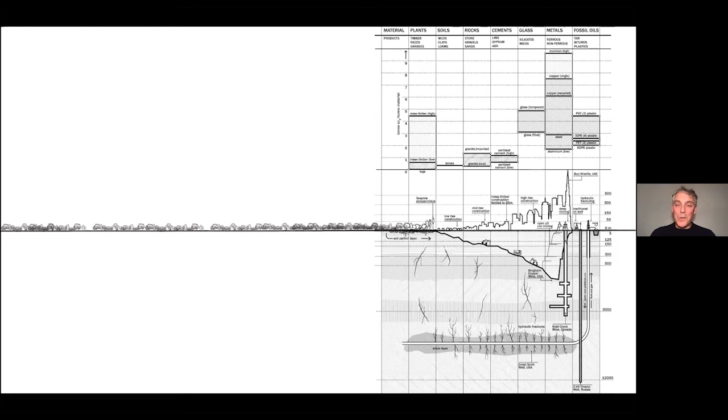I confess to having stolen the title of this talk, "What is Wood Anyway?" from my friend and colleague Kiel Moe, who asked this question, I'm pretty sure rhetorically, as we were walking down the street in Montreal one day after having heard a discussion on the new product cross-laminated timber. I think I took Kiel's question to mean, and I hope I'm not putting words in his mouth...

...that wood is misunderstood as a building product, and we need to look at it more broadly in a transcalar way. As he would say, from the molecular to the territorial. So I'm stealing this notion of the transcalar aspect of wood, and it's a way to approach it in a kind of systems thinking method, as the subject of my talk today.

So we know wood, we know it's a product, and we know that it has certain kinds of properties that make it challenging for contemporary engineering to deal with. And we know about boards and their different appearance grades and things like that, and basic structural knowledge.

But as architecture has become more commodified and its process more commodified, we've narrowed our vision of wood into increasingly marginalized ideas about wood, its properties, and its capacities. And we've become distanced from the actual aspects of what wood is, all of its attributes, all of its performance characteristics, and all of its potential implications for global health.

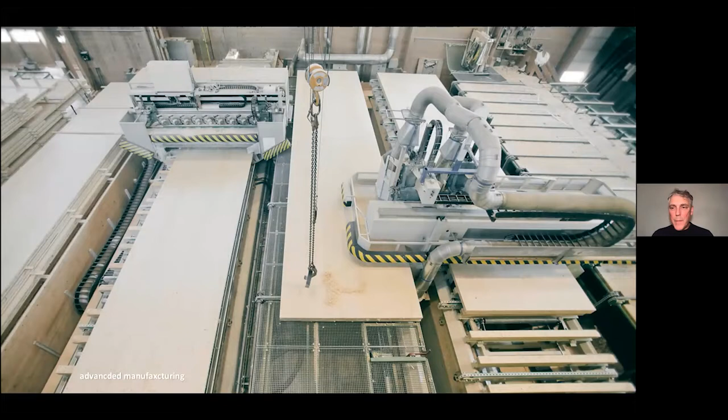Products that are particularly effective because they're really amenable to all the kinds of new computer-aided systems for manufacturing, and they come in extremely large formats, which means we can build buildings really quickly with them.

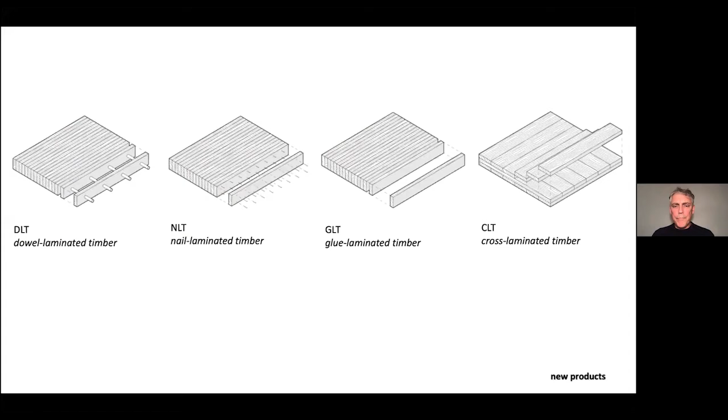And so these material assemblies can be scaled up into tectonic assemblies, and those tectonic assemblies can produce really big buildings, as recognized by the 2021 IBC.

I won't go into the detail of this, you're probably all pretty familiar with it, but essentially, we can now build buildings that are 3 times as tall as the buildings that were allowable under the old Type 4 heavy timber masonry, non-combustible enclosure building type. That means we can build really tall buildings.

And getting back to Kiel, what I guess I would say is the tall building, and the race to produce ever taller buildings made out of timber, is just one more product that fails to recognize all of the chances and opportunities that face us when we think about using wood globally in construction, and also that we potentially miss all of the challenges and dangers and risks associated with it.

So I think if I could sum it up, I think what Kiel really meant was: we could really screw this thing up.

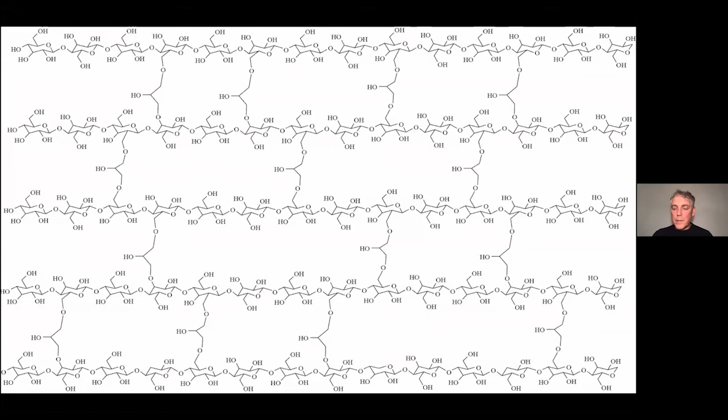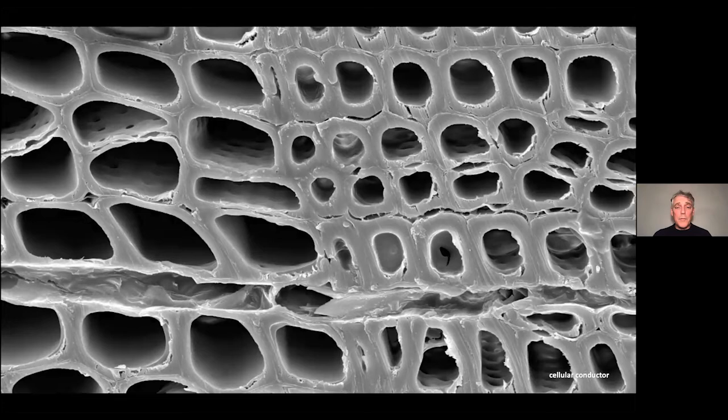Wood is a whole host of things. Wood is a molecular lattice that holds carbon, stores carbon molecularly. It's a sort of cellular conduit system for bringing water in and out of the tree and nutrients, feeding it nutrients, which has implications for engineers and also for the experience of wood as a building material and its irregularity and its expansion and contraction due to its hygroscopic nature, its water-loving nature.

But that may also be a benefit because wood buildings and wood-lined buildings in particular function kind of like a cigar humidor, where they modify temperature as they absorb and desorb ambient moisture in the air. And how could we possibly understand that better to make healthier buildings and healthier building interiors for all of us who might live in them?

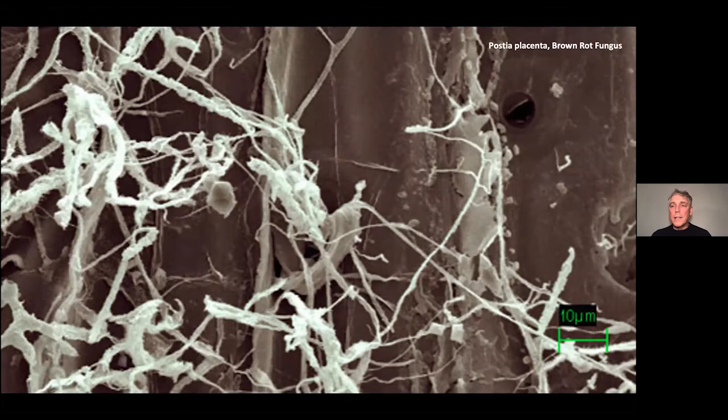And of course, wood is fuel. Wood is a fuel for bacteria and for fungus, and in its digestion, metabolically, it produces greenhouse gases, carbon dioxide, methane. Over half of the wood harvested in the world is used for fuel wood, domestic fuel, industrial fuel.

In certain countries, less advanced economies, wood makes up 90% of the fuel sources. And of course, it's a fuel for all kinds of wildfires in the built environment, conflagration, and also highly climate damaging forest fires that have run wild, as we know from our friends in California, Australia, Siberia. And these present huge risks.

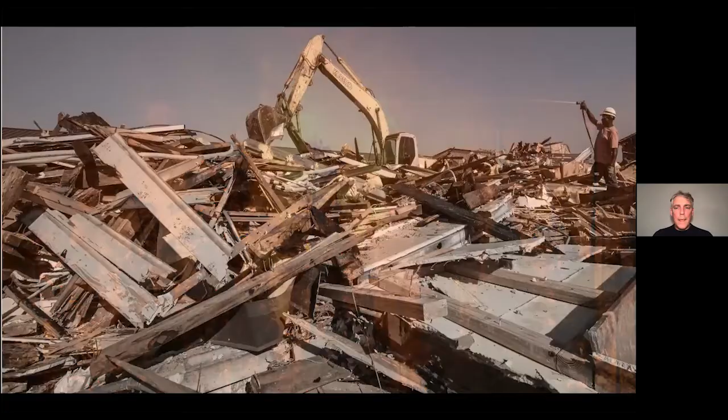And wood is waste. It's said that up to 30% of the wood that goes into a construction site comes out in a dumpster and goes undiverted into the waste stream. And that's only the construction phase of the building life cycle. That doesn't include the production, use, and end of life phase, which is a startling idea.

And so we try to think of wood as part of a circular economy. But if we think of it only as part of a biological cycle, part of the biological renewable cycle, we miss the point that we actually manufacture with wood, and it's very much part of that other lobe of circular economic circuits, which is the technical cycle. And how do we manage material that moves from an industrial waste stream back into a biological end-of-life state, which might be reinforcing global soils? These are really, really complex questions that circular industrial ecologists are just starting to wrestle with.

And of course, forests and wood are producers of weather and climate. At that scale, a forest stand has an important role in creating not only biodiversity, but actually our experience of the carbon cycle and the hydrologic cycle. And in addition to those many ecosystem services that wood and forests provide our planet, we also know that wood and forests are enormous terrestrial carbon sinks.

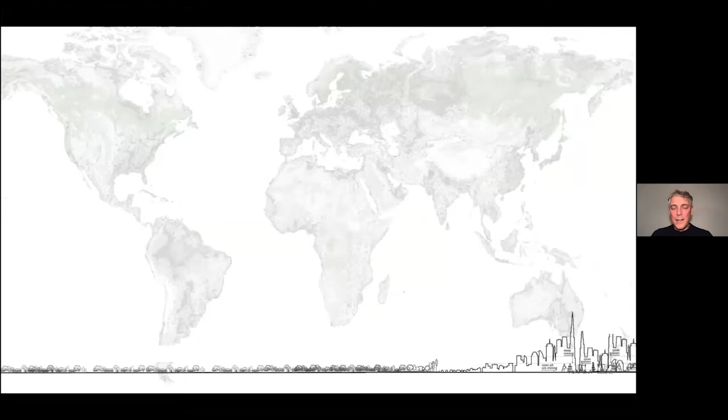And so that brings me back to this relationship between these two landscapes, the city and the forest. But first, I want to talk about a couple of converging factors that will play an important role in the future of our planet in the next 30 years. You're all familiar with this, so I'm going to go through it really quickly. The Paris Accord set a target of 1.5 degree temperature rise from the Industrial Revolution temperatures 170 years ago.

We have 420 gigatons of carbon dioxide that we can potentially emit before we run through that guardrail. Globally, we currently emit 42 gigatons of carbon dioxide per year. And if you're a better mathematician than I, you pretty quickly see that we're going to blow through that guardrail in 10 years. There are significant implications: mass extinction, inundation of Pacific islands, coastal cities, radical changes in weather patterns that we're already starting to see and are becoming even familiar with, and their potential economic impacts. Not to mention all the political economic upheaval and potential migration that will exacerbate political tensions globally.

I don't mean to paint too dark a picture. But the other piece of that is that we are converting forest land at a rapid rate. And the drivers of those forest conversions are part of our behavior as consumers of consumer goods, including food, agriculture, products that require minerals and fossil hydrocarbons for their manufacture. Where we live, suburbanization has had a huge impact on forest land cover, and climate change itself, producing forest fires, blights, insect and parasitic blights, viral blights that are wiping out forests, weather patterns that are changing the forest makeup, and in fact creating forest fires through drought, and our own mismanagement of all of those factors.

That's a building, not a city. That's a building with a 53,000 square mile footprint, which is the size of New York State. So from the tip of Staten Island to Buffalo, and from Lake Placid down to Staten Island, we have a building, and that's what we have to build.

And with that come impacts. The building sector—I'm talking about the building sector, industry, transport, industrial extraction, as well as the production, operation and dismantling of buildings—all of that, which is associated with the production of building, eats up conservatively 40% of our emissions budget. In other words, globally, the building sector is responsible for up to 50%, and some would say more, of anthropogenic greenhouse gas emissions.

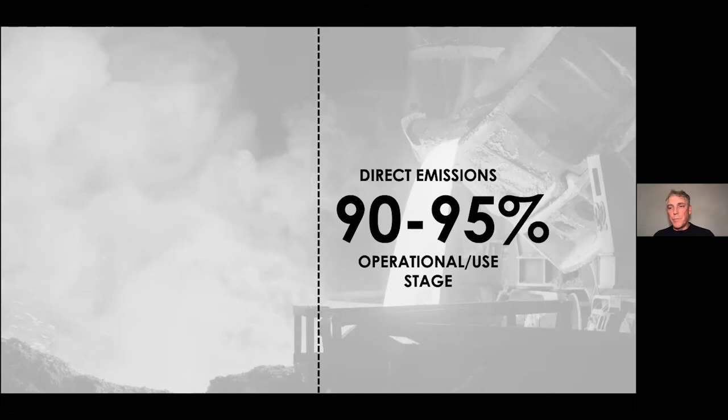Of that 40%, it used to be thought that because we ignored certain factors, about 90 or 95% of those emissions were emitted during the operational phase, the use phase of the building. So from the day that people moved in to the day that they tore the building down, that was where all the energy and water consumption produced all of our emissions. And we didn't think about that other small percentage of emissions that we mistakenly associated with the production, construction, maintenance, repair, and end of life stages of the building life cycle.

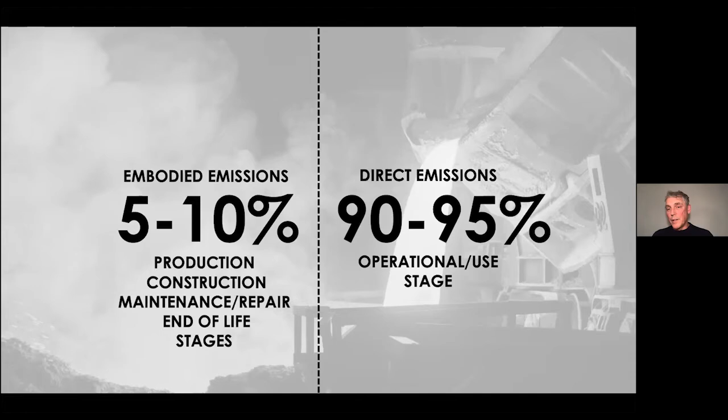But just to put that in perspective, by 2050, 50% of emissions coming out of the building sector will have been spent in the embodied phase. That sounds like a weird bit of math, but let me explain it this way. You take an existing building that you're not really doing much to and you're occupying it, and you take a new high performance building that we start building today.

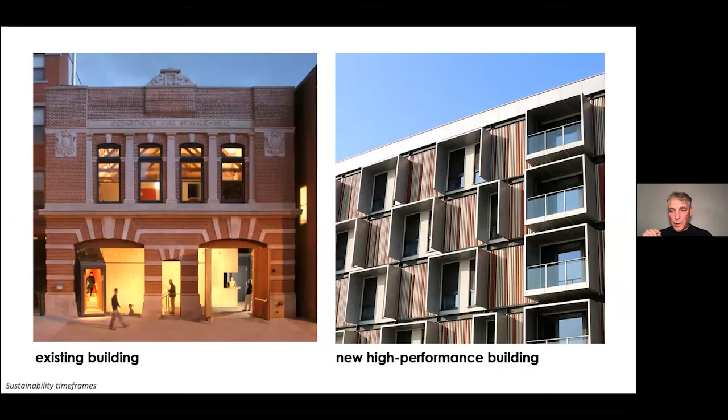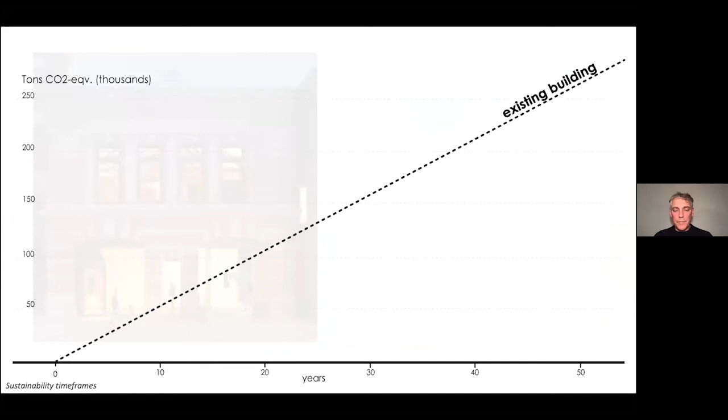The existing building has already dumped its emissions into the atmosphere and will continue, in its relatively poor performance, to emit carbon at a relatively quick rate over 50 years. The new building, although it performs really well and its emissions flatten quickly—or not so quickly, but within several decades—will match and then outdo the performance of the existing building.

That new building, that new passive house level building, dumps all of its emissions at the front of the building life cycle. This is exactly the time we shouldn't be dumping emissions into the atmosphere, because we're trying to beat that 2030 deadline. And so the question is—sustainability efforts heretofore have been all about operational energy performance, thermal insulation, and better mechanical systems.

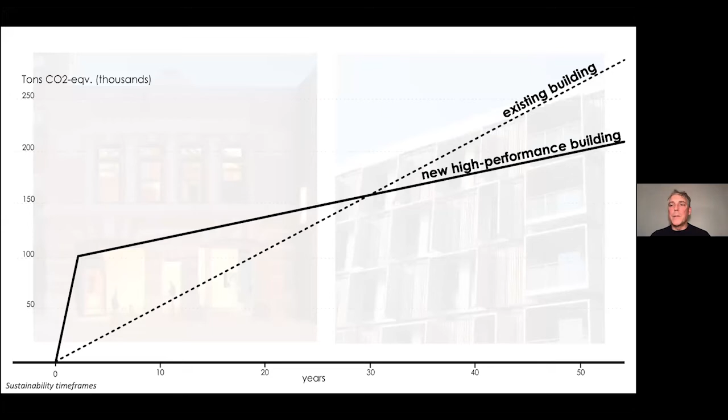And that was all really important, but we better think really quickly about how we use existing materials and existing buildings, because if we don't, what we're going to do is just extract more virgin material and produce more emissions.

And so that beautiful carbon cycle, that homeostatic relationship between the biosphere—plant biosphere—and the atmosphere, and our consumption of products like carbohydrates and oxygen and our emission of CO2 and water vapor, has in fact been upended by our work as builders.

So we used to build with biospheric products—plants, trees, occasionally surface rock and stone. But over the course of time, we've become more and more sophisticated at extracting more and more energy and emissions intensive materials. And quite literally, we have now dug ourselves into a hole.

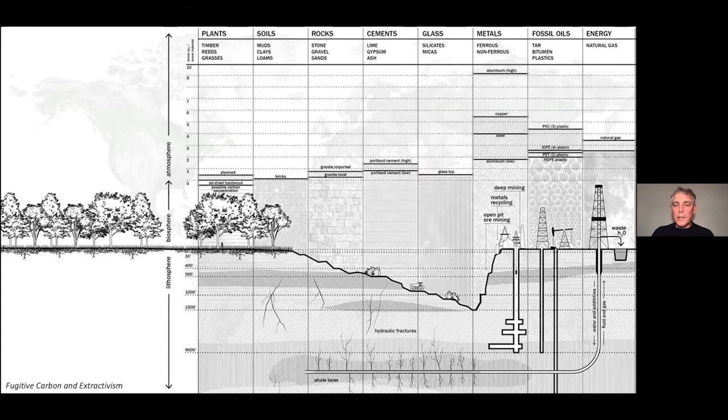And we have used up materials that seemed impossible to imagine being used up, like sharp sand, which is now so critical as a resource that it's in fact spawning criminal syndicates in the Indian Ocean, around the coasts, who are dredging for sharp sand to meet the demands in South Asia of urbanization and concrete production, at the cost of 40 gigatons a year, and in so doing, destroying habitats.

And the old standard way of comparing material was that we would look at a ton of concrete, a ton of steel, and a ton of timber when we think about how much carbon was emitted in the production of those things. And I guess that's fair—it's fair to compare weight.

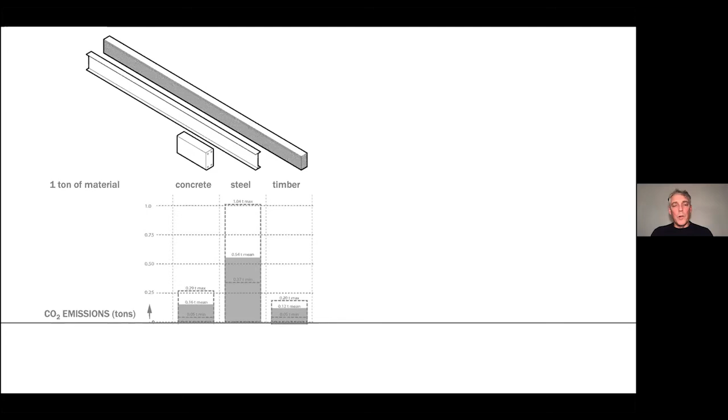But in a way, if you think about what a ton of concrete can do structurally versus what a ton of wood—especially engineered wood like cross-laminated timber and glulam—can do for their ton worth of material, you start to realize that we should really be thinking not just about strength to weight ratios, but strength to weight to emissions ratios.

And if you add carbon storage capacity into that, obviously wood, which is a biological, photosynthetically produced material using sun as a manufacturing energy, stores enormous amounts of carbon. It really changes the relationship between how we think about carbon emissions, because actually carbon storage becomes a really, really important part of this equation.

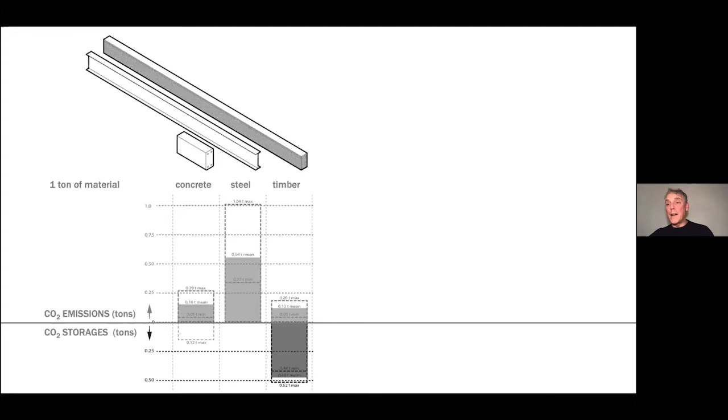And I would say that the term embodied emissions, which comes from embodied energy, is problematic to me, because there are tons of embodied, figuratively speaking, emissions in the production of Portland cement for concrete, and in the burning of coke and material for steel. But there's literally carbon in the body of timber. And so we have to be really careful about the terminology we use.

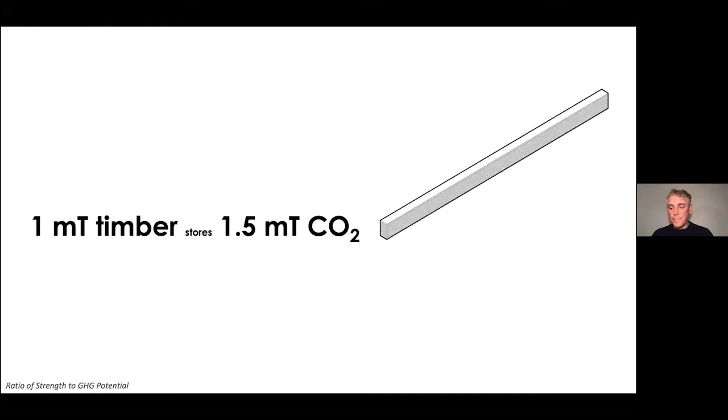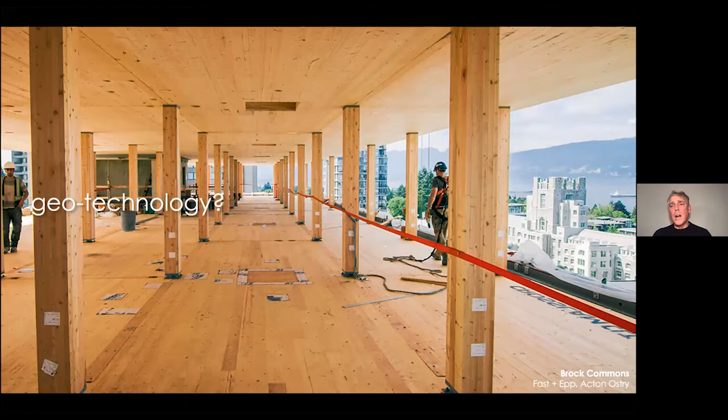As a gross simplified ratio, for every ton of timber we use, we store, depending on weight, species, age, and growing patterns, about 1.5 tons of carbon dioxide. So the question is, could this relationship between regeneratively managed forest landscapes and the making of big urban buildings out of timber, to meet the demand of a growing and urbanizing population, be our geotechnology, rather than shooting particulate matter into the atmosphere, painting roads white, or trying to sink carbon into salt domes below the surface of the earth?

Technology is a really challenging problem. Wood is at the forefront right now of technology. It's fascinating what's come of the revolution of nanocellulose. It's a new kind of technology that we really need to understand systemically.

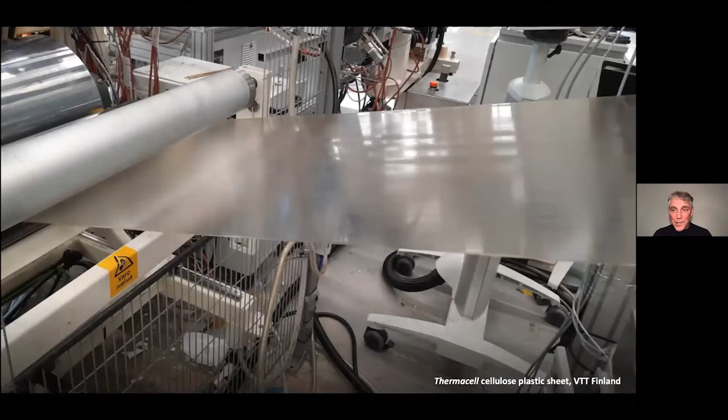At the nanoscale, we can produce translucent, and in the future transparent, plastic sheets. We can modify cell walls through nanostructural modifications to make wood more rot resistant and more fire resistant. We can use new adhesion techniques using lignin-based glues. We can study the activation of wood fibers by moisture and how that might become part of the functionality and performance characteristics of the building.

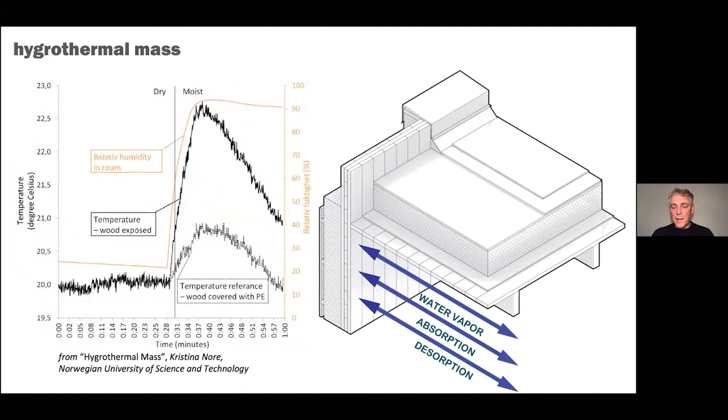We can think about hygroscopicity not only as wood getting wet and expanding and contracting, or understanding its moisture buffering possibilities, but also as a potential thermal mass benefit. Scientists working in this area have shown that as wood absorbs and desorbs moisture, it actually serves as a phase change material. So the idea that wood is both insulative and functions like a thermal mass, using the water in its cellular structure, is a promising area for energy stability in buildings.

But I want to talk about the dumb stuff, the stuff we all know exists, that we're manufacturing. It starts with this little cutter head, a finger joiner, and adhesive that hopefully will be less fossil fuel intensive.

This allows reconfiguration of the wood structural member so we can optimize different grades of fiber in the beam to make them perform better, putting the best fibers at the tension edge and second best at the compression edge, while dumping lower grade or different species of wood, which would typically be considered waste from a forest harvest, into the center and core of the structural member where the stresses are lower.

As in this case at Blumer Lehmann in Switzerland, where they built a five-story timber frame for a Shigeru Ban office building, they wanted to use up all the beech wood that wasn't being manufactured because it's difficult to work with. So they took the properties of incredible hardness and density of beech and turned them into laminated veneer plates and dowels, which they laminated into European spruce structural members that are incredibly strong, producing a steel-free five-story building.

And then, of course, we're working with all kinds of different fibers to take advantage of lower fiber quality, as at the University of Maine in Orono shown in the center slide, trying to maximize those in different layups.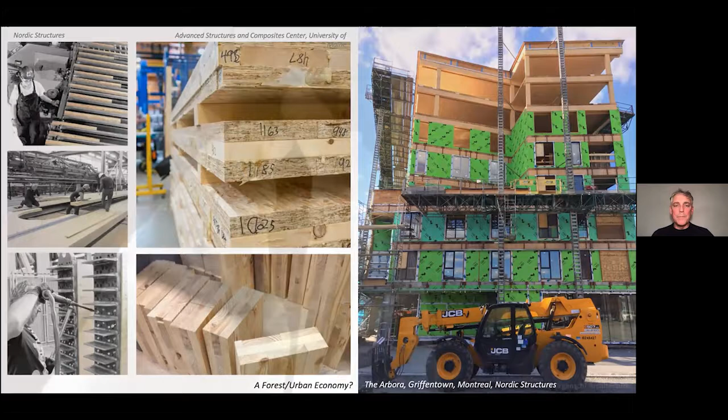I'll quickly tell you where I'm coming from: I started as a woodworker. I fortunately met my partner, Lisa Gray, who's an amazing designer, architect, and business mind. We started a firm that was an architectural professional practice, but it always had building as part of its makeup, its ethos.

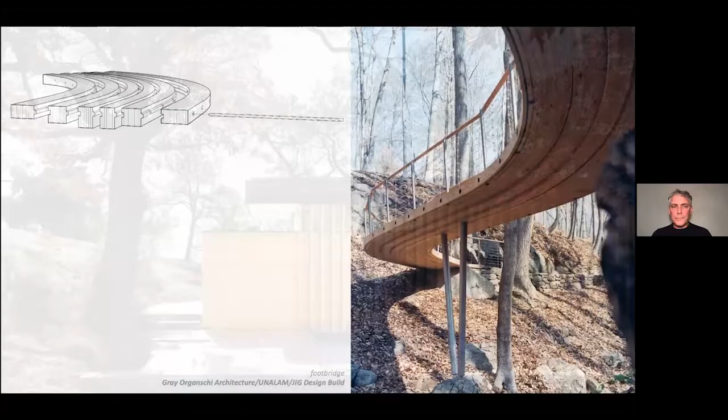From this kind of artisanal interest, we got really interested in the industrial capacities of laminating timber and how we could try to tweak those and tease apart the commercial configurations of what would become mass timber, using them in different kinds of applications, starting ironically with a bunch of vehicular and then pedestrian bridges and parkland.

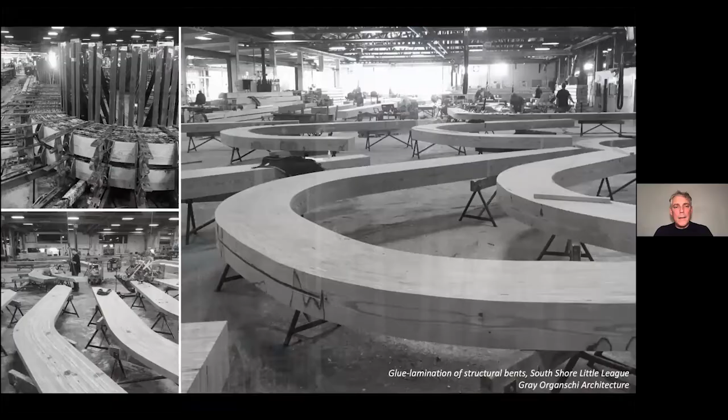And then finally, experimenting with this new product, cross-laminated timber, in different ways to produce, in this case, a cupola for a merry-go-round and event pavilion in downtown Stamford, Connecticut, or a baseball stadium for a Little League championship field in Staten Island.

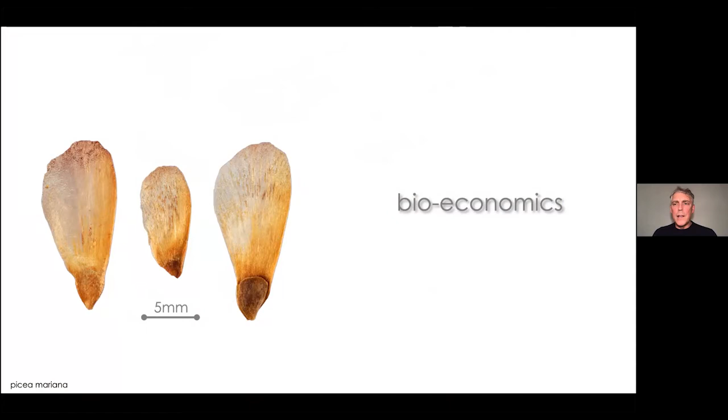But this idea of wood with bioeconomic potential came to us through one particular project, the Common Ground High School, right outside of downtown New Haven, serving as a public charter school for a bunch of kids who typically don't have access to a program that stresses ecological and agricultural project-based education.

And we became really interested in how we could go from this raw state of wood and turn it into these highly processed materials, and what the potential impacts of that process would be.

When we designed this building, they asked us to produce a pedagogical tool that the students could really understand about sustainability, and they wanted all the technological bells and whistles, and we put those in. We had daylight analysis with a lot of balanced daylight throughout the building to minimize electric illumination requirements, geothermal wells and ground source heat pumps to run the heating and cooling of the building, solar PV, which essentially reduces the operational loads in half for the building.

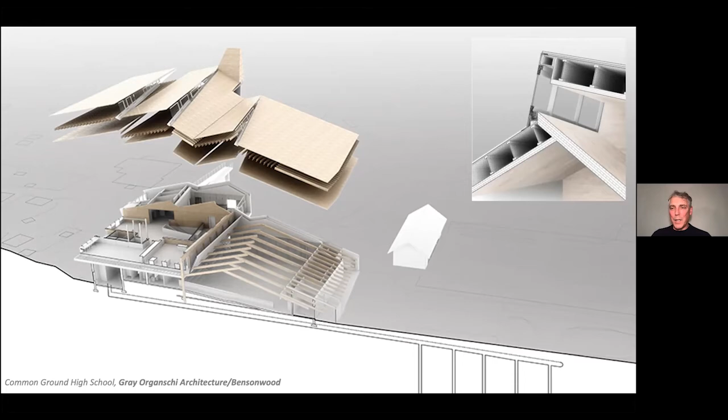Natural ventilation, stacked ventilation through creating these very high creases in the building envelope. But what we told them was that actually the thing that would be most palpable to the students, because they'd be occupying it all the time, and was potentially the most sustainable aspect of the building, was that we could build the entire building out of plants, carbon storing plants.

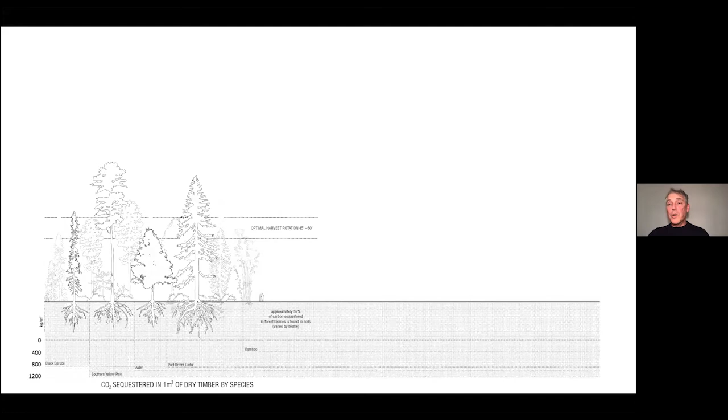So we started to model all of the different species that were going into the building, understanding their growth rate, their commercial harvesting rotations, what would be an optimum carbon storage rotation, and to understand that 50% of carbon in the forest is in the below-ground woody mass and soils. Looking at each species, its transport implications, how much carbon would be stored in the forest, how much would be lost initially through the removal of that, what could be grown back into it, and how we would move that material into the building and map it into the building assemblies and structures.

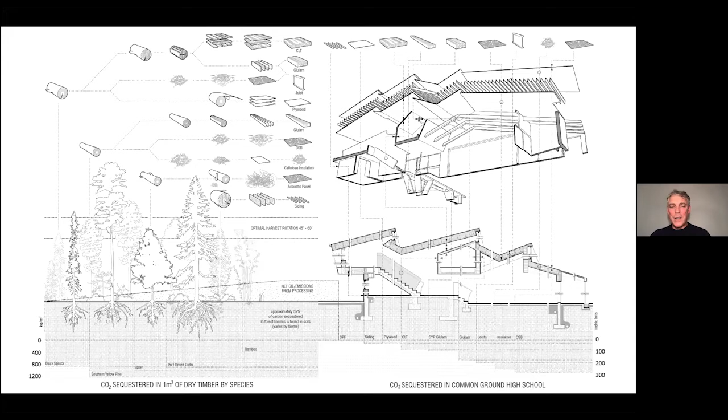Look below that ground line, you see all of the carbon that is stored and restored in the forest and building synergy, along with the relatively small net emissions that went along with the transport and processing of the building. And so from this small cut stand near Chibougamau, Quebec, through the transport of the material, the manufacture of cross-laminated timber and glulam panels, the assembly of those panels through a secondary processing plant at the Bensonwood facility...

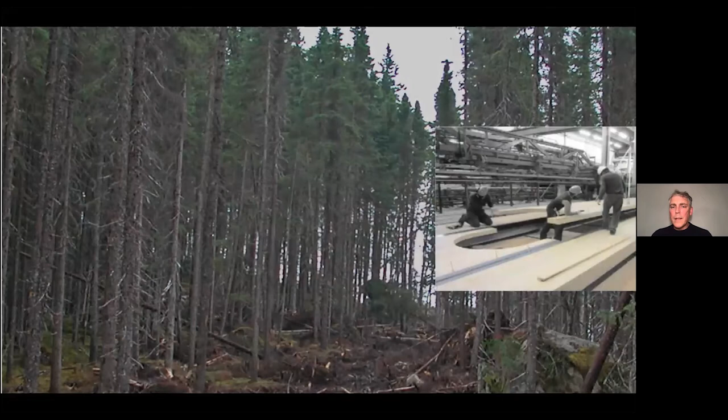...in Walpole, New Hampshire, its transport to the site, and with 5 carpenters and a crane operator, they built the entire fully insulated, enclosed superstructure of the building in 5 weeks, as opposed to the 3 months that it took to put in the foundations.

And so today the building functions not only as a school for 250 high school students from inner city New Haven and the region around it, the greater metro area, but also 20,000 New Haven residents who come through all of the various programs of the New Haven Ecology Project, which is also housed there.

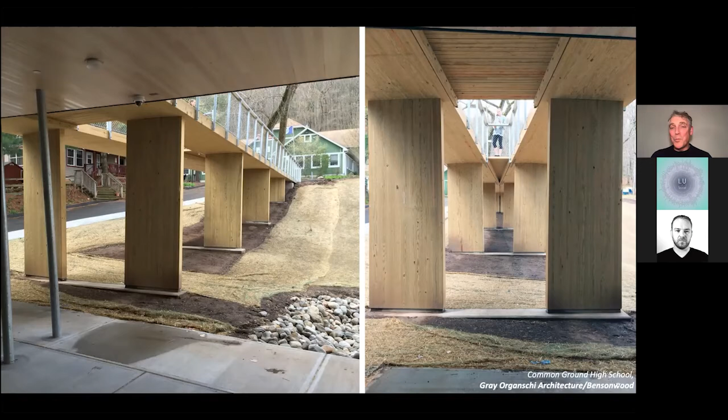And we replaced fire stairs with glue laminated timber bridges. And we did include steel, but we tried to be really specific about where metals would be used and how easily they would be to recycle or reuse at the end of the building's life.

And the building is lined with CLT, which is essentially an industrial material in large formats with plentiful daylight washing across it. And there are lots of other kinds of materials, aluminum doors and things like that, of course, and all the lighting systems and the solar photovoltaic semiconductor that's been sintered onto the panels, and lots of drywall.

But I will tell you that the students know exactly where, almost like it's pinpointed on a map, where that black spruce was harvested by Nordic Structures and manufactured, and where it was shipped to. No one, including myself, has any idea where the gypsum was mined for the drywall.

The interesting thing we heard a lot was that people were really psyched about the form of the building, its organization and spatiality. And what a lot of people said to us, and I've heard this from other developers who build out of wood, is that the building smells good, which tells you a lot, because I spent a lot of time in classrooms where I felt sick most of the time because of whatever they put into those buildings when they were built. And these students somehow felt that the building smelled good.

There have been studies that looked at students who spend a third of their living day in buildings lined in wood versus those without. And for some reason, which may have biochemical factors involved, students in the wood-lined classrooms seem to have lower heart rates and lower cortisol, stress hormone levels.

At the end of the day, the building was something we're really proud of, and it's great to see over time how the balance of systems work and where they don't, and how we've had to tweak them, because we have a great relationship with the clients.

We were also really interested in its impacts across the life cycle. We did a life cycle study and looked above the black line, the carbon transect as I've called it, which measures the impacts and emissions of all the different components of the building. These are things that through the production phase emit carbon. I'll tell you the electrical elements were a huge emitter because of the solar photovoltaic array, which requires a lot of heat and technology to produce.

For the graphic learners in the group, which I tend to be one of, if you take apart that building into its constituent components associated with CSI or Uniformat divisions of building components, we understand the building from a formal and assembly level. But if we remap that to reflect the role of these components as emitters, we create a kind of monstrous diagram of a gigantic roof made out of cross-laminated timber and timber frame, a small bit of internal partitions which are carbon storers, and then the big emitters like the solar panels I mentioned earlier.

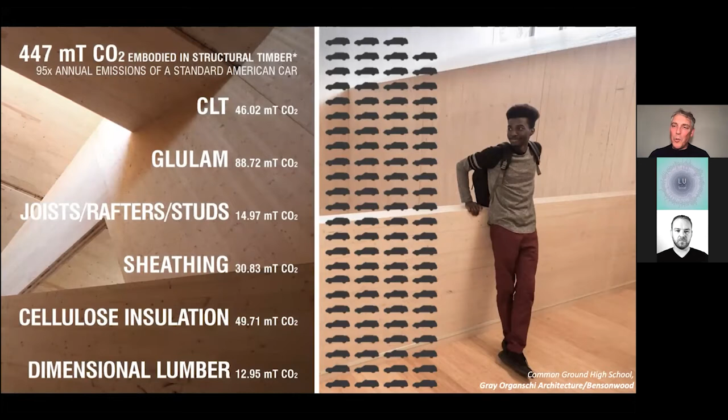Even a freshman in high school who did this analysis with us knows that the carbon stored in the body of the building is worth an offset of 100 cars' annual emissions. So basically, it's a counterbalance to our tendency to want to emit things. And it's a reliable one because we have the building information systems and models to actually measure how much these buildings weigh.

So that's a great story, right? We build buildings out of wood. We should, because wood's good. But it's not enough, given the incredible time constraints we have to solve the problem of climate change, mass extinction, and human impact through consumption. It's not enough just to build products out of wood, from toothpicks to suburban houses. This is how we use wood right now.

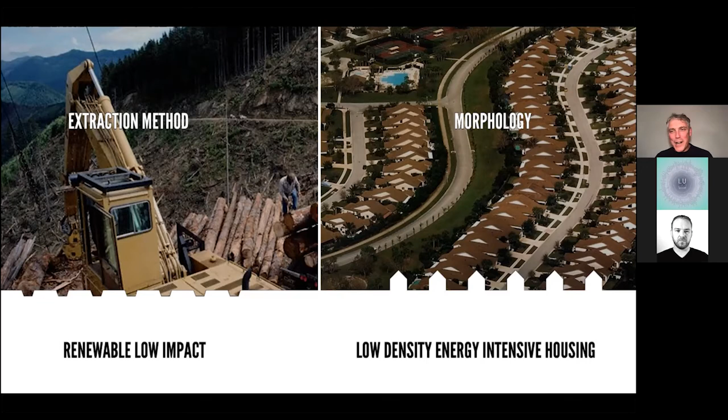Wood is an incredibly strong material, with a really high strength-to-weight ratio, and yet we apply it to low-rise sprawl. It's interesting to think that you can tie material density to urban density, those morphological questions happening at two entirely different scales. It's particularly interesting to me that a relatively low-impact material process, through its harvesting, moving, processing, and construction methodologies, produces this really intensive morphology of the suburban landscape, with all its infrastructural impacts, transmission line losses, and the inefficiencies associated with vehicular transport.

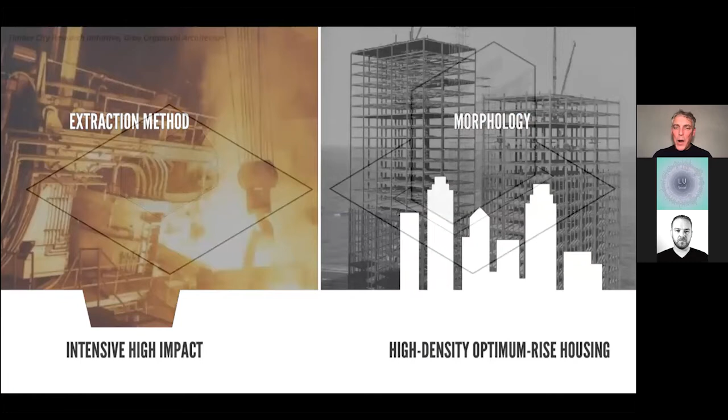While these super efficient urban morphologies, which share building envelopes, structure and infrastructure, actually have to use materials that are highly extractive with enormous energy and emissions profiles. So how do we break the relationship between these two worlds? How do we break the relationship between mineral-based

material processes and cities, and the relationship between forests, which are photosynthetically derived materials, and dumped into land-intensive morphologies? And we start to see the benefits of carbon storage. It takes 20 trees to build a typical suburban house, and it stores 48 metric tons of carbon. You can store 7 times as much carbon and house 40 more families in a building on the same footprint if we build densely.

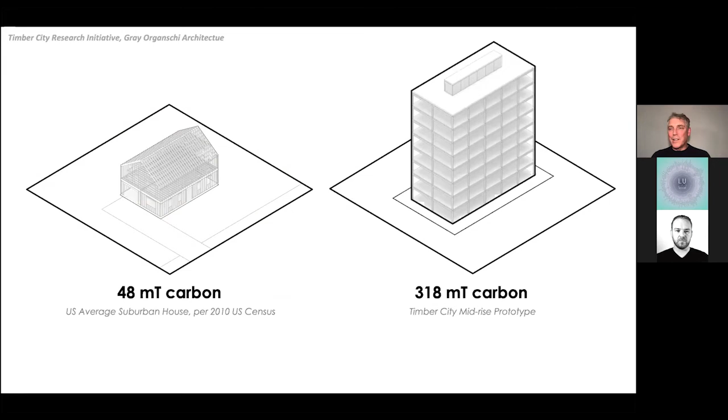There's no question that we know that. And there's a big question about how people want to live. But if we think about scaling that up to a much larger scale, we really see the benefits. And then the question is, how do we move all of this material from suburbia, not literally, but in the way we approach building morphology, into dense cities where the storage capacity is enormous?

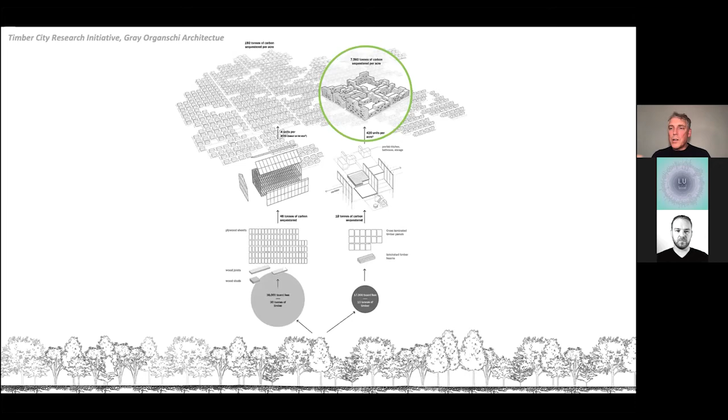And we do it through these really new material systems that I was a little bit skeptical of in the beginning, which are mass timber and all the other bio-based systems that can be applied to mass timber primary structure. And here's that relationship where, through regional forestry and regional forest dynamics and production, we can break that relationship that happens between the production stage in building, material manufacture stage, and the building use stage.

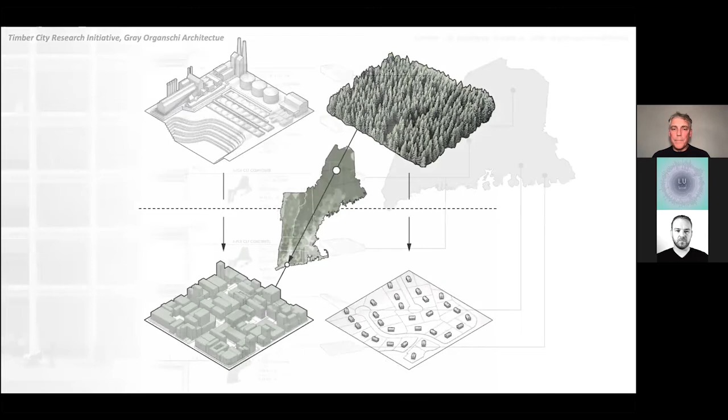So we did a study, and we took basically the forest yields in a typical year out of the state of Maine, which happens to be the big mama in the northeastern woodshed, wood production. And we studied all the different products that could come out of it, their capacities, and we engineered a building. We mapped those building components onto it.

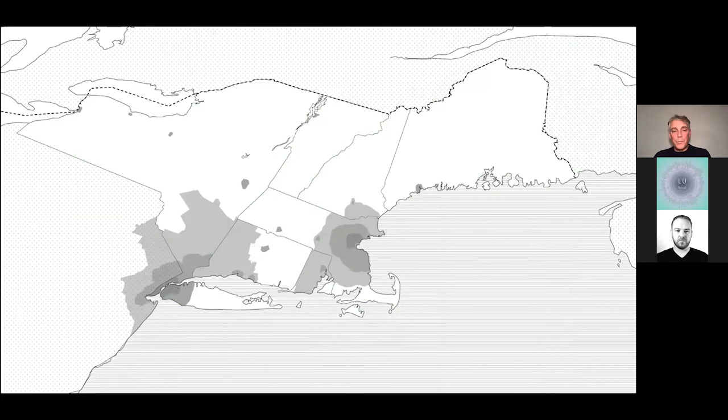And so you can see across New England this enormous wood basket, right? And also these demand centers of urban growth, New York greater metro area and the Boston greater metro area. And that includes up to Portland, Maine, and Providence, Rhode Island, and New Haven, our little city, New Haven.

And so we looked in New Haven, we started to try to test these principles of building as we did 100 years ago. This is a firehouse where we were asked to add a dormitory for visiting musicians. We'd turn the firehouse into a recording and performance space for regional musicians. And they need more housing because they couldn't afford the hotels in the city. So they asked us to put a new dormitory on top of an unreinforced masonry building.

And what we found was the materials which went up in one day, a prefabricated rooftop penthouse apartment dropped onto the roof in one day, nearly fully enclosed, adding 3 bedrooms and a bathroom to this 8,000 square foot building, actually reinforced the masonry. The unreinforced masonry was not strong enough to take the weight of a typical construction.

Stick frame was too flexible and light, not rigid enough. And so by using mass timber, we actually used the new building addition to reinforce the structure of the old building laterally.

I won't go into it in much detail. It's entirely made of wood. It was kind of a test to try to convince regional developers that you could build an interior mass timber building, not have to finish it, and it would be a great place to live. And the musicians who get to live here while they're recording in the studio seem to like it.

And it's been a real profit center for Airbnb for the owner of the recording studio. But more importantly, for cities that are struggling like New Haven with a historic building fabric that is generally fairly low rise, 2 to 3 stories, and built primarily out of unreinforced masonry, the idea that you could use the building addition to not only increase density, but solve the problem of structural stability was something that a developer wanted to try.

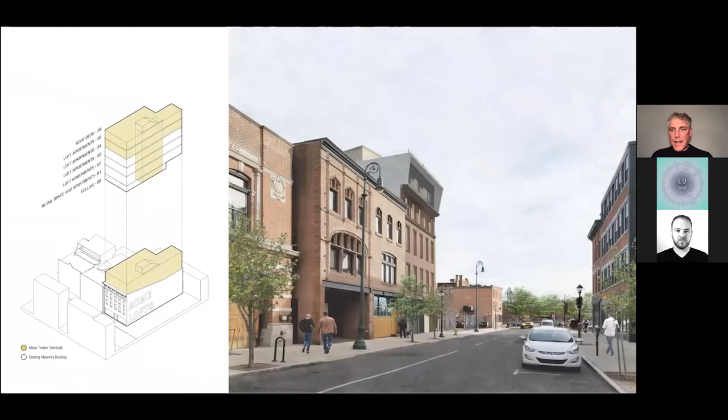So right there, you see it to the left, the old historic shot of the Firehouse 12, which is now a recording studio, our studio in the middle, those 2 bays, and then beyond that is the Acme Furniture Building. And we added 2 stories to that building, and we put an entire CLT shaft down into the body of the building to lock it into the foundations. And ironically, all the furniture that had been densely stored in that building was heavier than the superstructure that we put onto it.

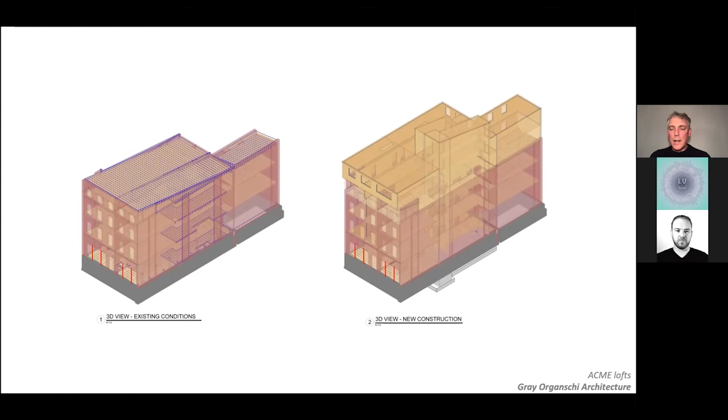And so now there are a number of apartments suffused through the building, and we've added a third extra density on that street without destroying the existing building. The existing interiors feature the brick lining, and the new interiors feature the cross-laminated timber.

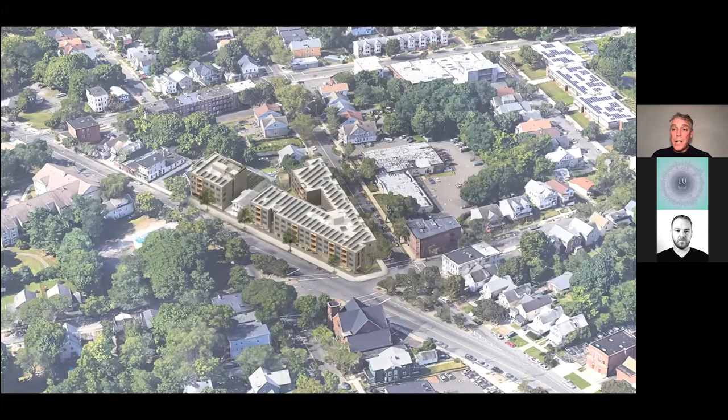That brought us to a new development project, this time for a historically Black neighborhood, an affordable housing project with low-income tax credits, a 70-unit housing project where some residents would be at 30% area median income. The question was, could we build affordably? So we designed an entirely plant-based building, siding, structure, all CLT, talked to a number of manufacturers, finished the CDs, and came in at $205 a square foot, which means we have a really good shot at producing affordable housing out of mass timber systems. That goes all the way down to the wall assemblies, which use cellulose fiber insulation and acetylated wood siding.

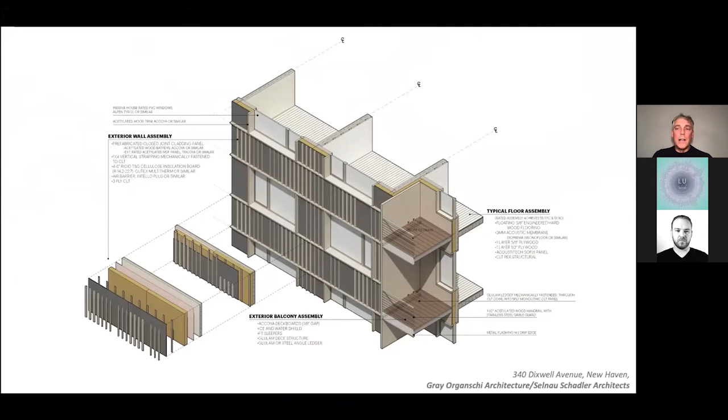That's prompted a new project in New Haven, which a historically Black business group is founding in one of the really damaged areas of the city, an entire new educational residential complex for the city.

This all arises from a study we did, which was to look at the landscape of a piece of working forest in Maine and a few blocks in the city of New Haven, and to study those relationships between supply from the forest and demand from the city. We engineered a series of building types out of mass timber that could fit into all the surface parking lots that existed in that somewhat damaged quadrant of the city.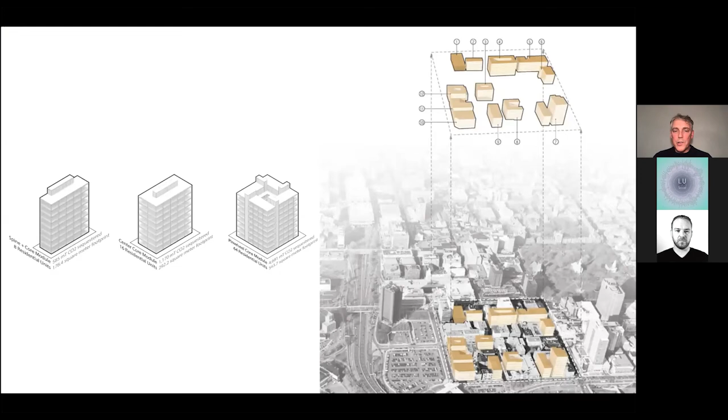We looked at the stem succession of the forest stands we were proposing to harvest, and what kind of different biodiversity, rates of growth, and species development could happen through that succession. Essentially that analysis started with a 1,500-acre stand of forest, a quarter of which we left entirely in reserve and harvested in small bits, transmitting that material to 24 acres of urban building over 45 years.

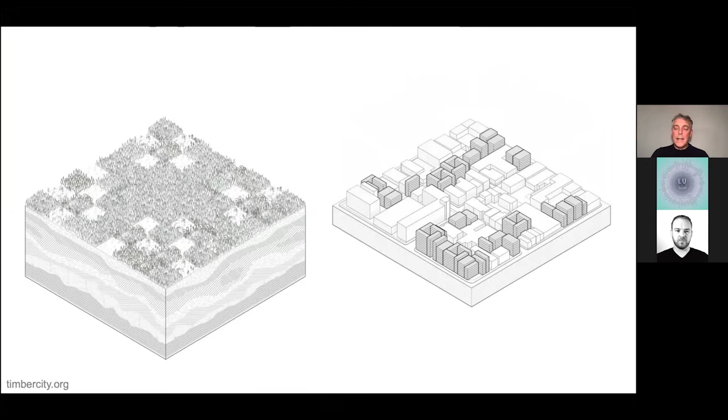We started calculating how much carbon would be stored as we harvested and moved that material into the city to fulfill the demands of the Ninth Square Vision Plan for that particular district, while considering the rate of growth and restoration of those forests and the different kinds of habitat created as they grew. In the end, we found that we actually preserved quite a bit of carbon. We reabsorbed a huge amount through the photosynthetic activity of the regrowing young forest, stored quite a bit of carbon, but avoided even more—almost twice as much—by not building out of concrete and steel.

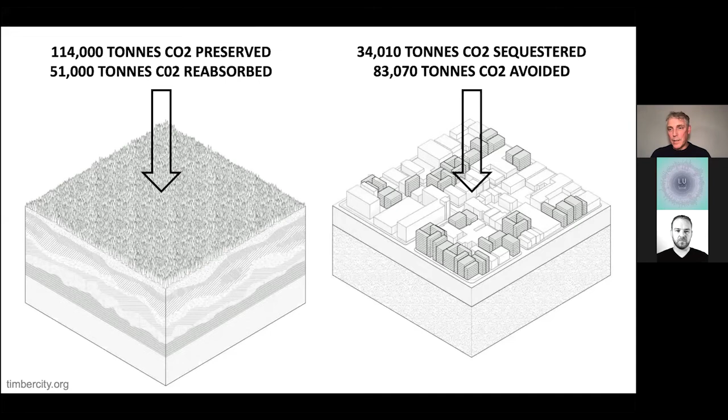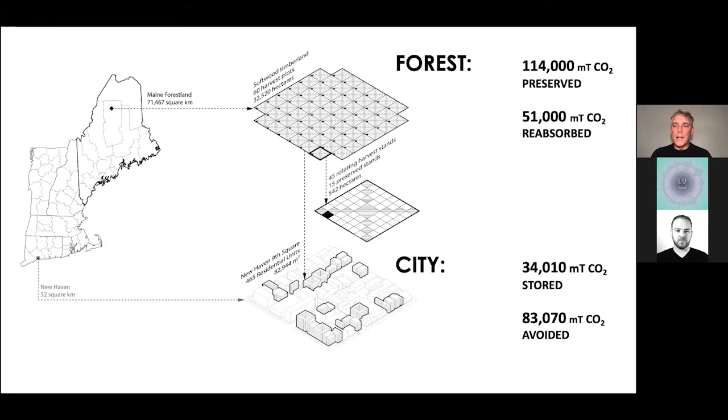If you start to translate that volume of carbon that's substituted for, avoided, reabsorbed, and transferred for storage into the city, you start to run the numbers on its potential economic implications, especially if we can develop a cap and trade system that includes the value of wood stored in buildings as well as wood grown and maintained in forest land. We can start to imagine not only the old trope of how many emissions were avoided—65,000 cars worth—but also, if we apply the current value of carbon as a waste byproduct and how much it costs to emit it, turn that over as an offset benefit to urban developers, cities and their jurisdictional authority for urban development.

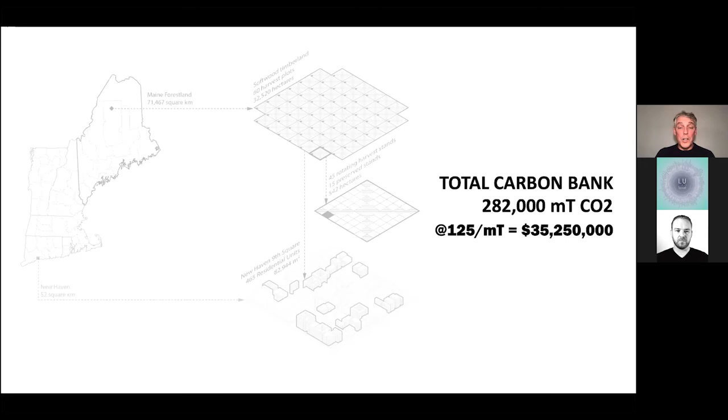Then we started to actually imagine, at the rate of cost increase that carbon pollution will entail, that carbon markets will really begin to reward mass timber if we can learn to durably transfer and store material through regenerative forestry practices rather than extractive ones.

For our Buildings as a Global Carbon Sink paper, we had a big what if: what if we considered this not just at the regional scale, but at the global scale? What if we could create a dynamic in which forests were restored, incentivized to healthy regrowth, afforestation, expansion of forest cover, protection of really valuable forests, and use that wood—which would otherwise fall in the forest—to actually build all of the global demand for buildings and infrastructure?

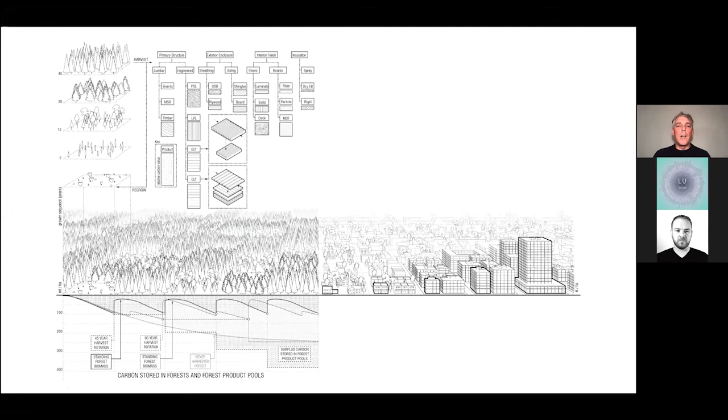So we began to map the forest succession, the carbon storage cycles in the forest. We started to think about how the emissions would look as we translated that into all the possible products that are already at hand and available on the market, and most allowable by building codes.

And we looked at low-rise assemblies, and we also looked at high-rise assemblies. And no surprise, because we all passed arithmetic in second grade, the bigger, denser buildings store a lot of carbon.

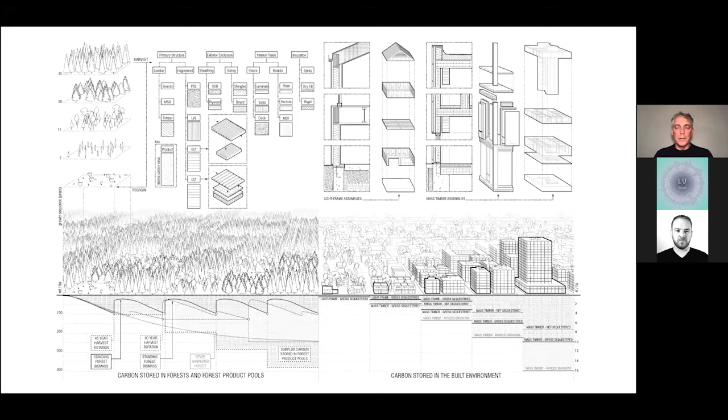If we can carefully study exactly how forests grow in different regions and different exposures, we might be able to take a really valuable lesson from that natural flux and start to think of new products with new possibilities that would have typically been considered waste wood, and bring them into the urban fabric, literally, and gain that storage. But if we're not tracking it carefully, it's just nonsense. It's a fallacy, and we have to be careful that we don't oversell mass timber as a product.

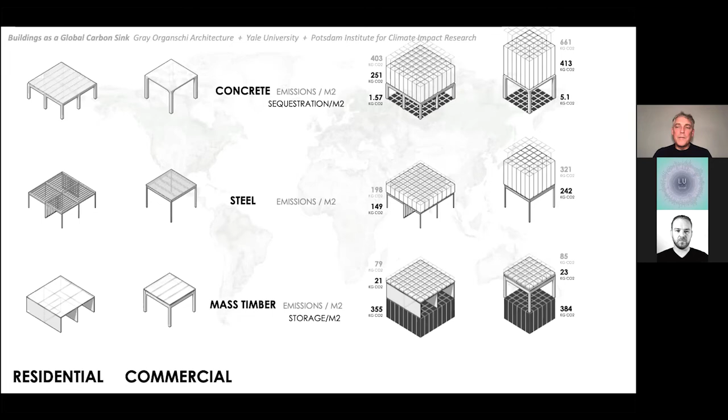So we looked at that, and I'll go through this quickly. We looked at different commercial and residential morphologies, structural spans for primary structure. We looked at the different ways that steel, mass timber, and concrete as primary structural systems could either absorb or emit carbon. And through that arithmetic study, what we essentially found was what was not surprising: that if somehow we could build all that building with mass timber, we would find an enormous benefit.

I'll quantify that for a second, but just a proviso: we used different deployment scenarios. One was to look at the areas of the world which already had forest product industries intact, ready to go, and that were already producing mass timber. It just so happens that only 10% of global population growth is going to happen in those advanced places.

That's just part of the Kuznets curve of socioeconomic growth and benefit. Then we looked at these secondary centers, which are likely to adopt mass timber industries and have fairly robust forest systems. And then finally, we added the big nut in this equation, which is Africa, which will show enormous population growth and has extremely vulnerable forests.

And so we understand that there's a problem of transfer, and we have to address that. And there's a problem of social equity that's really critical here. But just from a numerical standpoint, what we found was that we could actually bend down the accelerating curve of carbon emissions, the business as usual line.

We could store anywhere, depending on the different deployment scenarios, between 3 and 28 gigatons of carbon in 30 years. And that has a significant impact, as biomass projection has a significant impact on our ability to start to mitigate climate change through the built environment, as opposed to just trying to adapt to the climate change, which is going to create more carbon spikes, more seawalls, which will entail the production of more concrete.

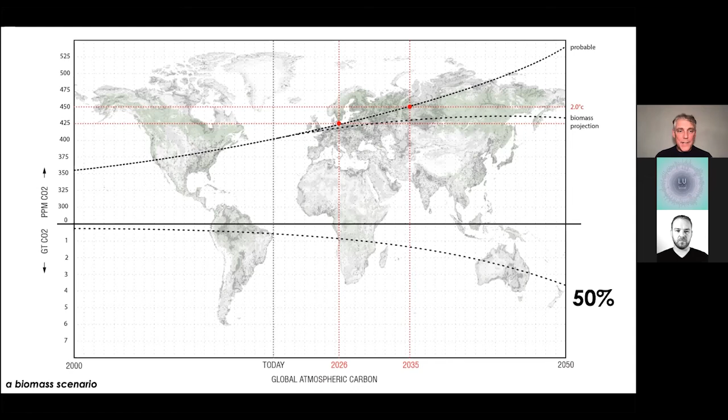So this brings me to some questions that I'll close with. If we choose to use this tool of buildings as a means of carbon mitigation, we have to ask ourselves, can global forests sustainably supply that demand? Because it would be a real shame if all we did was turn the mass timber industry into a driver of one new extractive industry, harvested wood products.

Can we respond more subtly and supplely to the changing dynamics of different forests and different regions? Not only just the high-grade species that we typically grab for building products, but to understand the secondary and tertiary species, the rate at which they grow, optimize carbon, et cetera, and develop new products that might use those, from insulation to membranes to acoustical sound absorbing systems, as well as primary structure.

And can the mass timber market and all those other biogenic material markets grow fast enough? Can we convince people to give us the social license to entrust us with the harvesting of trees rather than the deforestation of landscape to build a demand for these products?

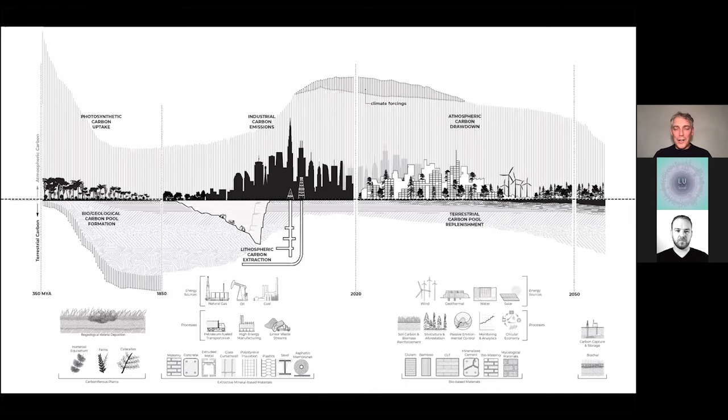Can we decouple healthy, convivial urban space making and consumption to, in some future, create a terrestrial carbon pool and a process of its replenishment through all the different devices we have at our fingertips? So I give you this positive view of what happened through geological history, what's happened through our more recent anthropocentric history, and what might happen if we use the same technologies that got us into this hole to dig us out of it. Thank you.

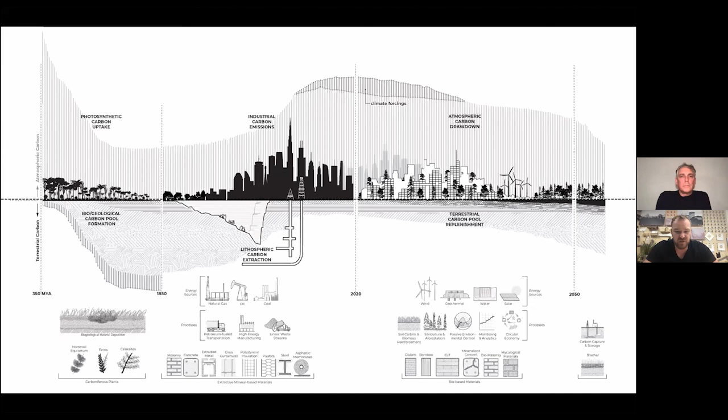So we're getting towards the end of your time. I'm sure you're tired of staring at me on Zoom here, but we still have a strong audience. I have two more questions. I'm going to pose them to you and see if we can do them in some kind of brevity here.

One of the questions asks: can you speak a little bit about the timber industry? Who grows the trees, who processes them? Are these global companies, unions? Who are the laborers? I know you said you're not a forester, but maybe you can speak to your particular processes in your region that might help understand what you've been working with as team members, as we look at this as a system of people working to make one task—a better built environment.

Part of this is a sort of existing condition, and part of it is aspiration, so I want to be clear about that. One thing we think about is the fact that the sawmill industry today is, as one of my colleagues described it, a high wall we can't see over. We don't know where those trees are really coming from. There's been a lot of predatory behavior in the sawing of trees.

FSC tries to address this, but there are unintended consequences with different kinds of products and certifications. Shipping Southern Yellow Pine to an FSC laminator—trees grown and harvested in Georgia shipped up to New York and back, because the FSC laminator was the only one who could get the certification for a Living Building Challenge building in Atlanta. And you're just like, okay, I don't think we meant that, right?

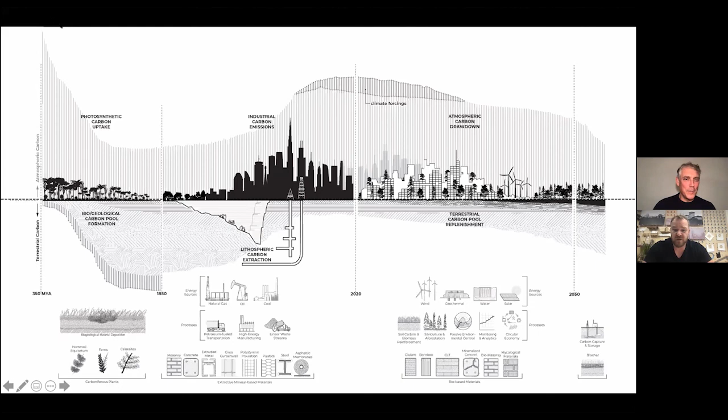Again, Alan, thank you so much. It's my pleasure, truly. Good night. Enjoy, everybody. Thank you.